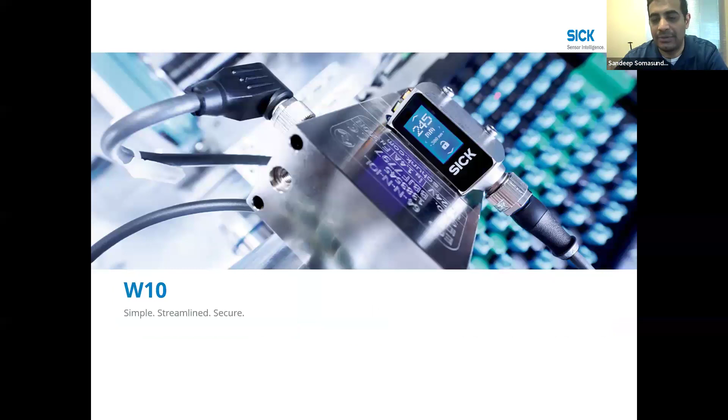So today, we'll be talking about 4 products, which are our latest and greatest. The first one is our latest sensor, called the W10. As you can see on the screen, this sensor is completely touchscreen, so there's no buttons anywhere on the sensor, and it's very intuitive to set up. Some of the main unique selling points are that it's simple: it's the world's first touchscreen interface without any buttons for setting up the sensor, and I'll show you later that when you move through the menu, it's pretty straightforward to set it up.

It's streamlined, consolidating many variants into one sensor. In the sensor, you can do background suppression and foreground suppression, and you can set pin 2 and pin 4 to PNP, NPN, or push-pull. There are 3 modes: fast, standard, and precise. And the last is secure. Since it's touch, you might wonder if someone can mess with the sensor. They cannot. You can lock the sensor and no one would be able to play with it.

There are 2 variants, short range and long range. On the left, it starts from 25, the minimum offset. One variant goes out to 700 millimeters, and the second to 400 millimeters. It's class 1 laser, so it's safe. It has 3 modes which can solve pretty much all applications, and you can configure it to background or foreground suppression. It's made of 316L stainless steel and it's IP69K, so it's very robust.

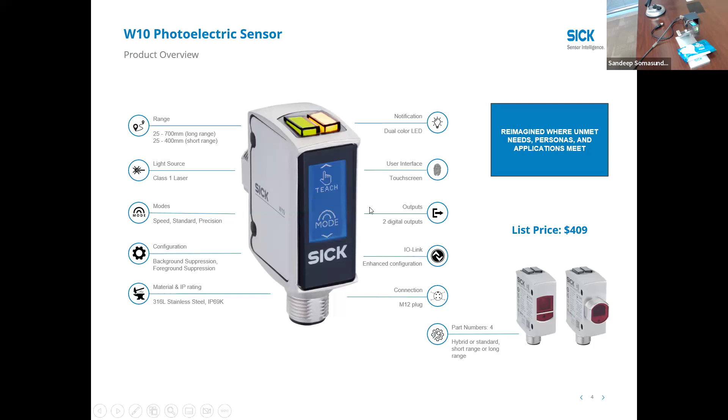I also wanted to show you guys the SOPAS interface that we have. Just a second. So can you guys see my screen? Yes. Yep.

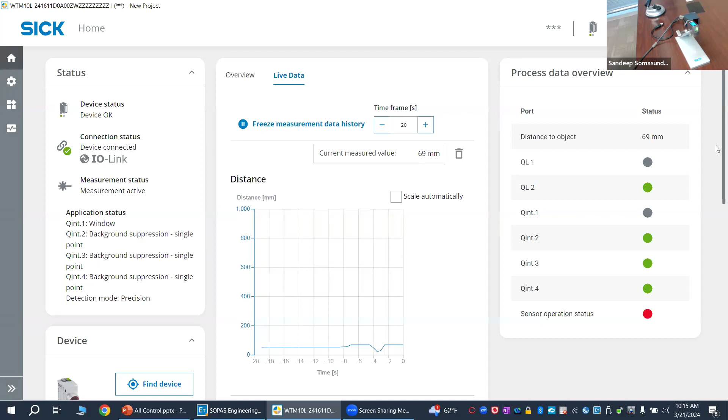Okay, so this is the GUI of the sensor. And here you can see a couple of things like the live data in terms of the distance. You can see the current measured value. And then here you have 4 outputs that you can get via IO-Link if you have the flexibility to use IO-Link. And then you have the status of all the outputs.

Now, if you go to configuration, basic settings, here you have pin 2, where you can select PNP, NPN or push-pull, as I showed on the display. And similarly on pin 4 as well, you can select PNP, NPN or push-pull. And you have the local user interface lock, where you can lock the screen so that operators or no one can mess with the sensor once you install it on your shop floor.

And if you go to the connection options, you have the process data that you can select. So if you go to the enhanced sensing, here you have the options in terms of the output. You have the single point, 2-point, foreground suppression, and the window mode. So window mode is you set a window, and when the object goes through that window, you get an output. And the window mode could be configured only through SOPAS.

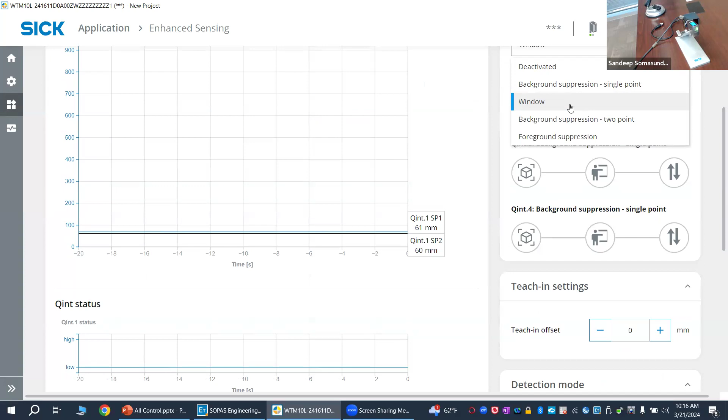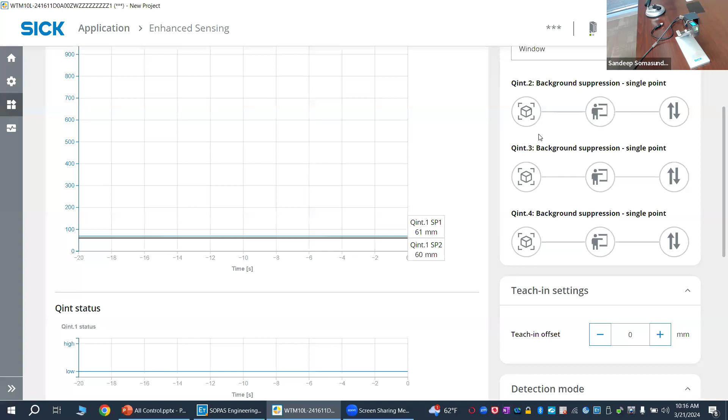Right. And similarly, you can do the settings with all the 4 outputs if you need them on SOPAS. And these are the 3 different detection modes that I was talking about. And here you can select speed, standard, or precision.

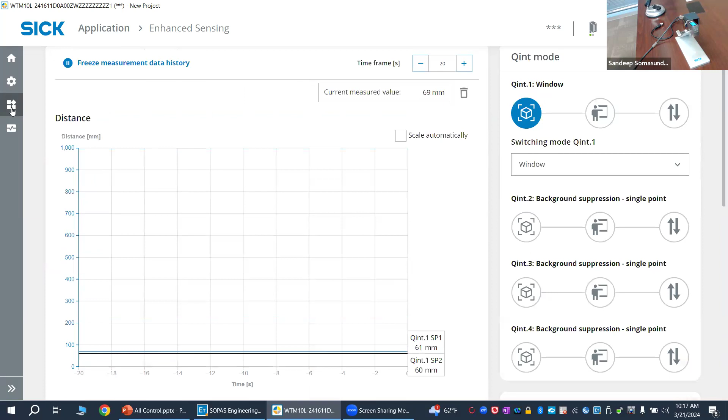And you have the smart task here where you have basic logic gates like AND or XOR that you can set up if you want to do like a local level field logic. If you want one output of 2 sensors, you can do that, and you can offload that from the PLC. So it's a smart sensor.

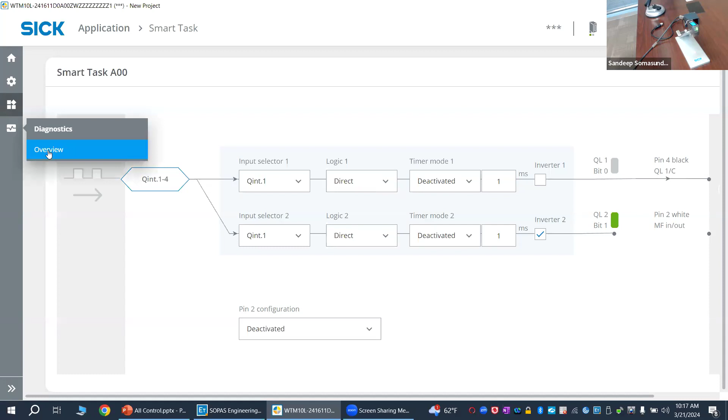Then here you have the diagnostics where you get to know what's the temperature on the sensor and how many operating hours has it been on, and so on. So that's all I had. Do you guys have any questions on the sensor?

So I don't see any questions coming in on the chat, but I'd just like to reiterate what Sandy was just saying. The whole idea for this sensor is it's got all these capabilities. It's one sensor that you can basically use to pretty much standardize a ton of the applications that you have at your facilities. One sensor for various applications, standardizing it. So you have a sensor, basically you can do a foreground suppression mode, you can do your background suppression mode, and the IP69K for your washdown applications.

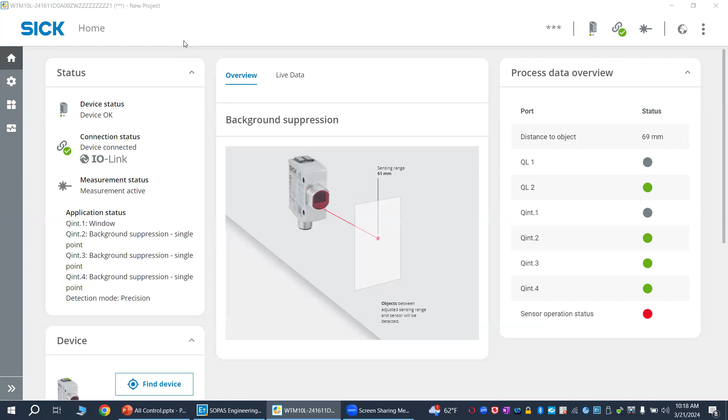A very good description is just 4 part numbers. Instead of having a situation where you're trying to find a part number for a sensor for an application, going through an entire list of tens, if not hundreds of part numbers, you only have 4 part numbers to choose from. Basically the difference being choosing something that has a 700 millimeter range or 400 millimeter range.

And then also the face of the sensor, you have the mounting. Basically, you have your hybrid mount, which has a nose for most applications in the US, and then also the mount where it's flat, where you want to mount your sensor in a different way. So pretty much just 4 part numbers to choose from. And it has the IO-Link capabilities as well. The response time is fantastic, as fast as 200 microseconds for most applications when you have it on speed mode. So these are all the different things that you have built in one sensor to standardize your sensing needs.

Okay, so if no one has any questions, I'll go to the next sensor and give a couple of minutes. Guys, have any questions?

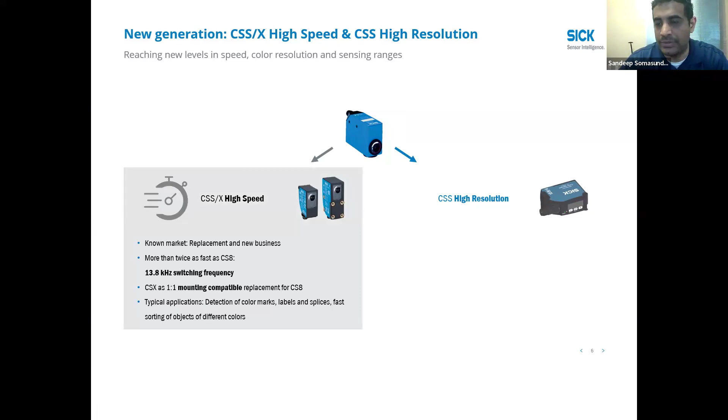Okay. All right, so the next one that we're going to talk about is our color sensor. This is one of our latest color sensors, and it comes in 2 variants, as you can see on the top: the high speed variant and the high resolution. The high-speed variant has a switching frequency of 13.8 kilohertz, so it's pretty fast. And then the high resolution sensor has LAB, which means that it has very high resolution and can detect even the difference in shades of the same color. It's very precise.

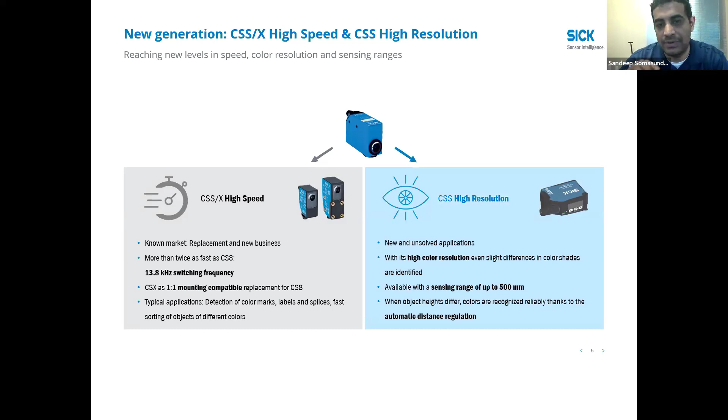And one of the main benefits is that the range of these sensors is from 50 millimeters to 500. If you mount it at any range from 50 to 500, the sensor automatically can detect and work. On objects with, say, monochromatic colors, we would go with the high resolution one. And if it's different colors, we would go with the high speed, and also for high speed applications.

Now, I can show the sensor that I have with me. This is the sensor. Not sure if you guys can see. Let me just connect this to my laptop. Just give me like a minute.

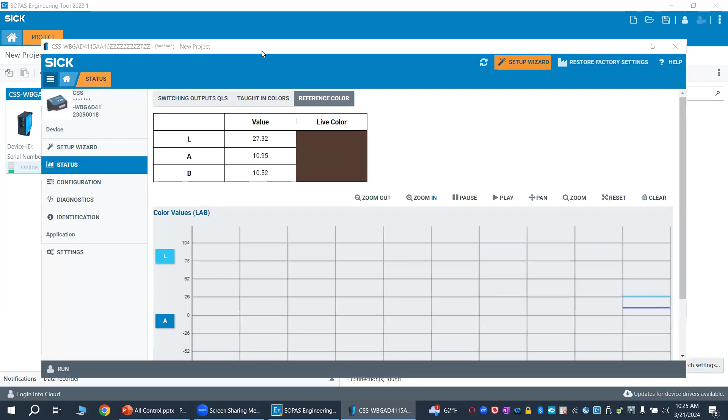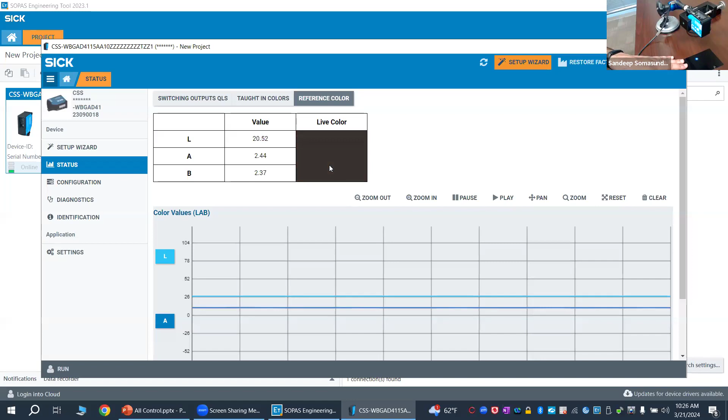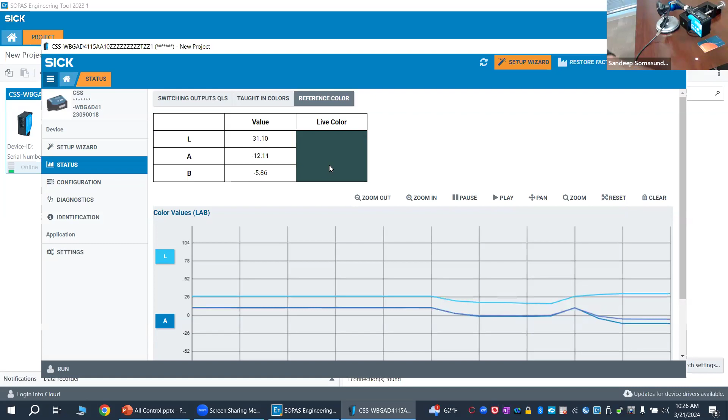Okay, can you all see the screen, the video? Awesome. So as you can see, this is the GUI of the color sensor. Now the sensor is looking at the table, which is brown, so you can see the live color as well. I have different cards here. I have a black card, which I moved in, so it's saying black, and then I have my key fob and it says that color too, and then I have a white card. It should tell you the color is white.

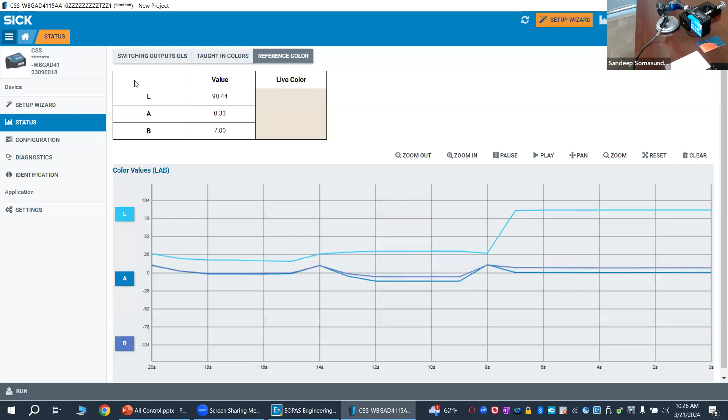So a couple of things you can do with the sensors: you have the switching output, where you can get 4 outputs via IO-Link. This sensor also comes in 8-pin variants where you can get 4 digital outputs. It also comes in a 5-pin variant where you can get 2 digital outputs, and if you want more outputs, you can get it over IO-Link.

Now, if I go to the configuration, a couple of things I wanted to show you is that you have the best fit mode, the color mode and color plus intensity mode, which helps you in detecting different shades of the same color as well. And then if you go to the teach-in, you have sensitivity, which is the color matching value of the object that you teach in.

So you have 2 types of teach-in, single value teach and multi-value teach. Single value teach is for colors which are monochromatic. Multi-value teach is if it's not monochromatic and you have multiple colors, and you want to get an average of all those colors and get an output.

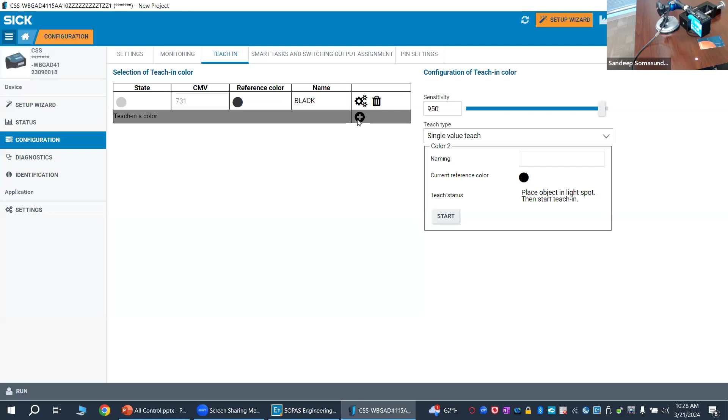Now I can put this as black and do single. So you can see the output is on, it's off, it's off. And if I want to add another color, say for example, I can teach white. See, it's on, it's off. It's off.

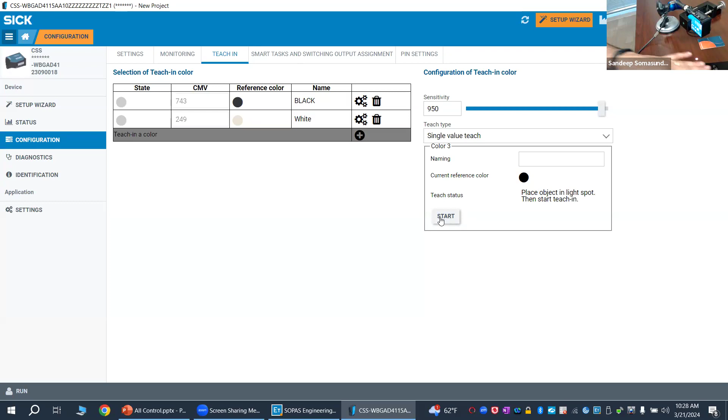And another feature which is pretty good with the color sensor is the settings where you can drag and drop. Now I've taught 2 colors. I can drag this and put it to any output I want: Q1, Q2, Q3, Q4. And these are the different outputs. These are the pin settings, where you can get an output on pin 2 and on pin 5 as well.

Yeah, these are some of the applications. It's basically to detect color marks or slightest color differences, let's say beige and white, which usually a lot of color sensors struggle with.

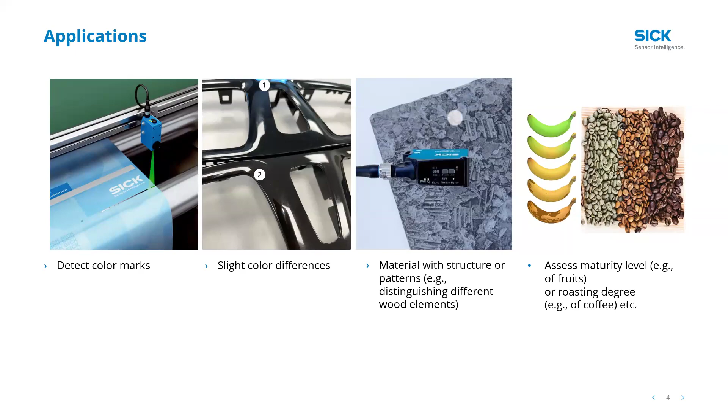But with this color sensor, you can differentiate even the slightest difference in shades of colors. You can also solve applications if there are patterns, materials with different structures or patterns. This is done with the multi-value teach that I showed you on SOPAS, where it takes the whole pattern into consideration, or if you move it around, it takes an area into consideration and stores it. Another application is probably to detect the maturity level on fruits, or roasting degree, example coffee, etc.

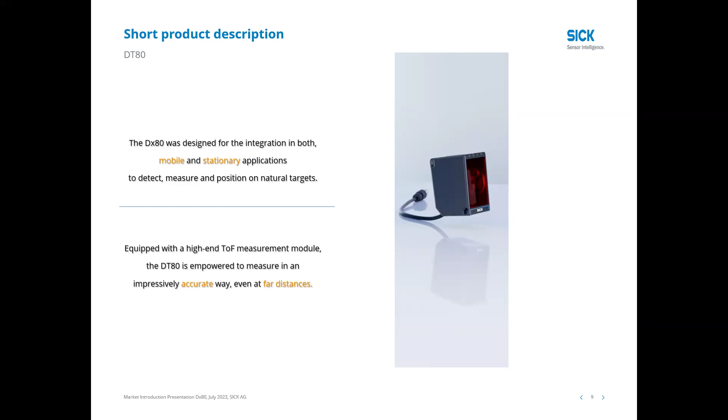Okay awesome, so the next sensor I'm going to talk about is our DT80. This is one of our latest distance sensors that came out last year, at the beginning of this year. This was mainly made for applications in mobile and stationary applications, to measure the position on natural targets. This sensor works on time of flight technology, and it is very accurate even at far distance. DT80 means the sensor can go out up to 80 meters, and it's got a minimum offset starting from 50 millimeters. So basically the range of the sensor starts from 50 millimeters all the way up to 80 meters.

Some of the main benefits of this sensor is that it's got outstanding accuracy - plus minus 2 millimeters at 80 meters. So if you have any application where you need to detect something far off and need high accuracy, this would be the sensor to go with. It can also do measurement on natural targets, and all kinds of targets that I've tested, it works really well.

It has a TFT display on top, and you can also configure the sensor on SOPAS as well. It is pretty compact, the size of the sensor, when you actually look at the capabilities having range up to 80 meters.

So these are some of the same points we discussed. It's got an accuracy of plus minus 2. It has very high resolution of 0.1 millimeters, and the measurement range starts from 50 to 80,000 millimeters at 90% remission - that is for on white objects - and it goes out to 14,000 millimeters at 6%, which is basically dark or black objects. Then it comes in a metal housing, and the dimensions are 33 by 65 by 57. The communication interface on the sensor is IO-Link, analog, and digital output, so it has all three in one.

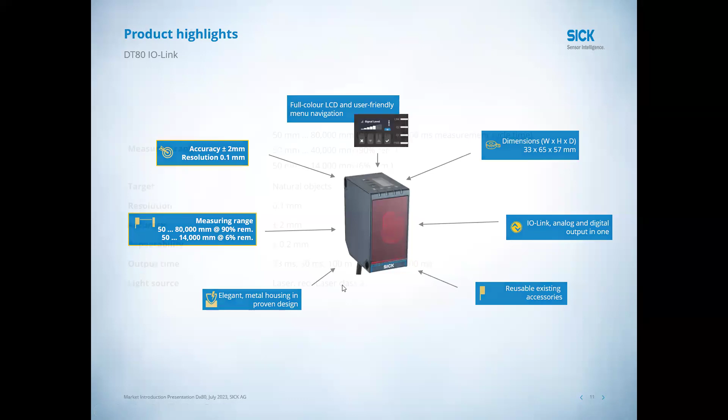It uses laser class 2, and you can see the repeatability as well. If it's stagnant, you get even better accuracy - it's less than 0.2 millimeters.

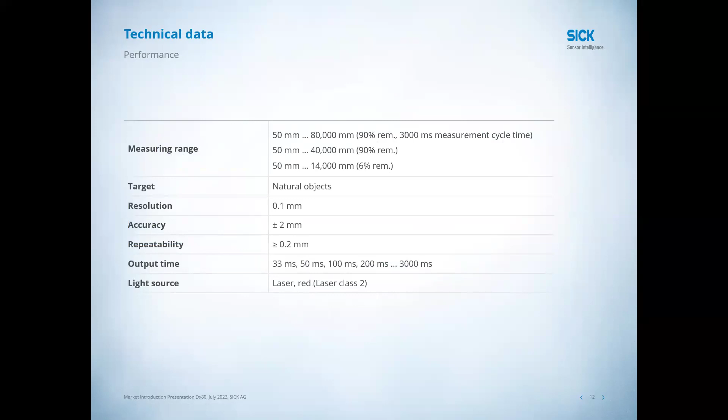And it has SOPAS - I'll probably set up the sensor. Just give me a couple of minutes to show how you can configure this on SOPAS.

Just wanted to show you guys the sensor. This is the DT80, as you can see it's metallic. It's pretty compact if you compare it to any other distance sensor. And then you have the display here with the buttons, which is pretty intuitive, where you can choose - there are multiple options, which I'll show you guys on SOPAS.

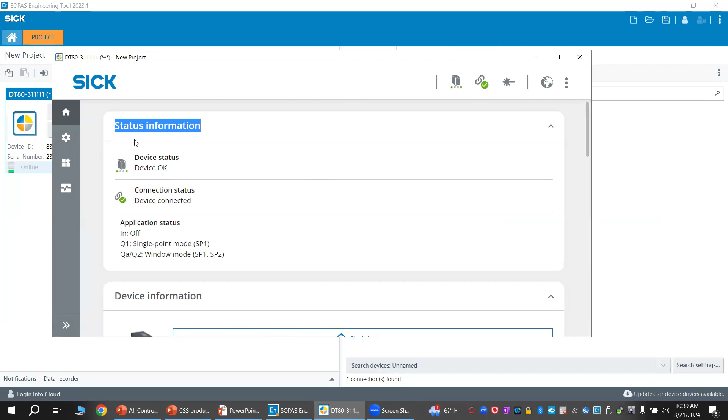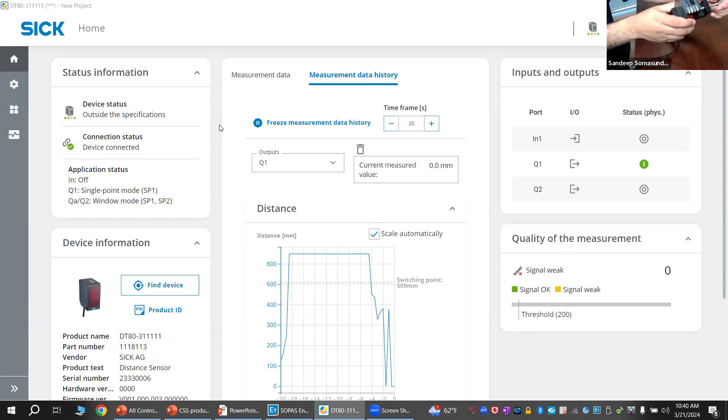Okay, so the interface is kind of similar to the W10 sensor. As you guys saw on the W10, you can see the live distance. Now you can see the current value when I shoot it on the wall. The distance decreases as I bring it closer - look at the table - it decreases, and it starts from 50 millimeters.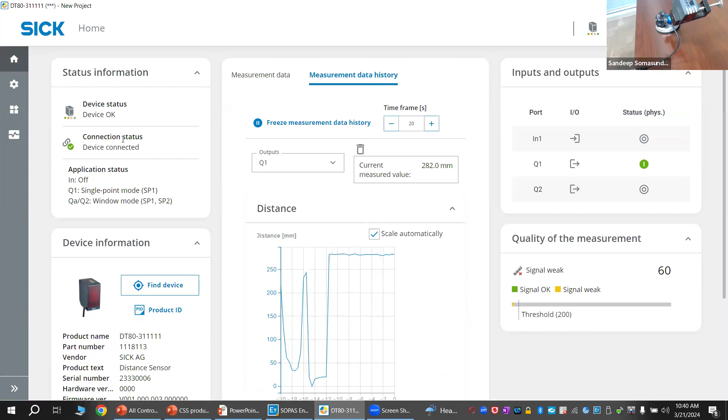And if you go to the basic settings, you can see the current measured value. You have the cycle time that you can adjust, from 33 milliseconds all the way up to 3000 milliseconds. Then you have an option where you can switch on and switch off the laser. So now when I switch off the laser, as you guys can see, I don't think there's laser here, right? I can't see the beam. Yes see, it's another option.

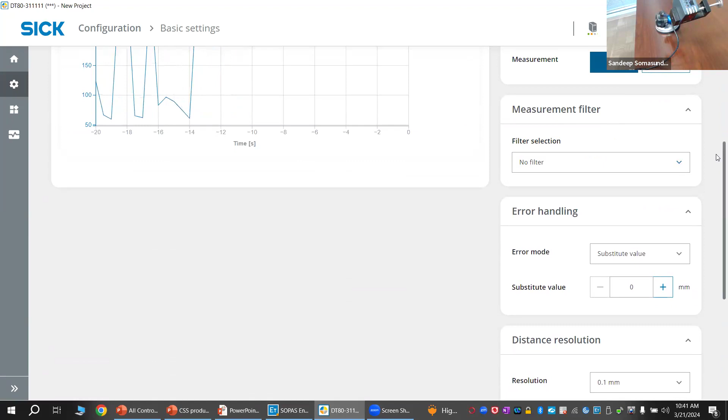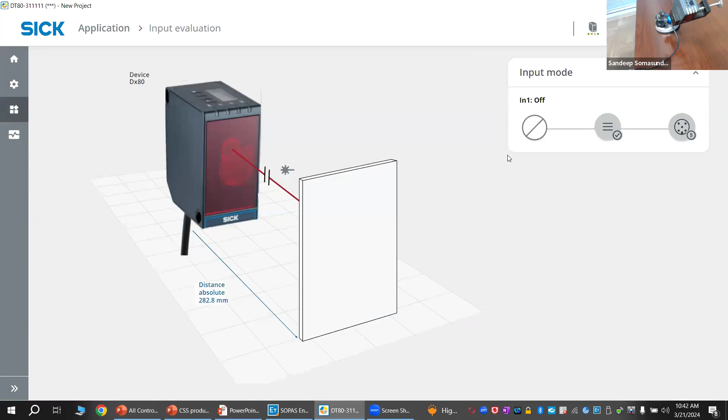And you have the filter option based on the application that you can set into average or median. Then you have the device access logs option here. Then if you go to the connection options, this is the IO-Link process data that you can get from the sensor. Then you have the input evaluation, the output evaluation that you can set. This is how you teach it on SOPAS - you have different options: single point mode, window mode, and window plus SP1 mode. And you have the analog output that you can set on SOPAS as well.

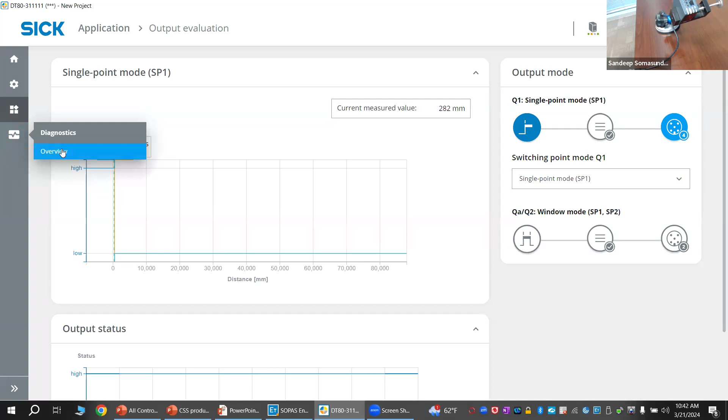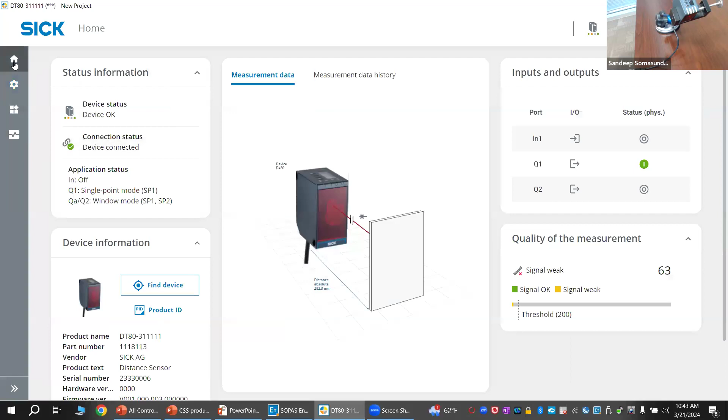You have the diagnostics where you can see if there is any error, if there's any fault with the sensor you would get a notification, and then you have all the other options where you can see what's the temperature on the sensor, etc. So this is the basic overview. I can get into more detail if you guys have any questions, but this is about our new DT80 sensor.

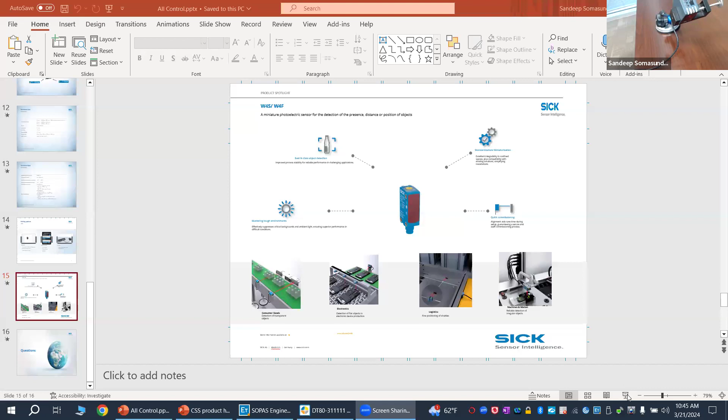Okay, so this is our last sensor. It's called the W4S, and this is the new design for the W4. This is one of our miniature compact sensors, which comes in all three different principles: background suppression, through beam, and retroreflective. Some of the benefits of this sensor, not sure if you guys can see my screen.